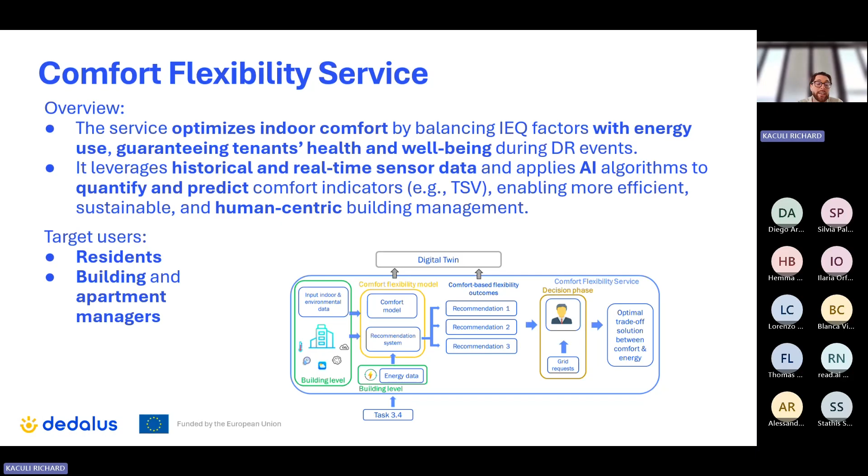I want to note and highlight that this kind of service is a human-centric service, so everything is tailored around the user, and the users are residents or building and apartment managers. How does the service work? We start from the building level, where we have installed all the sensors, the IEQ sensors, and of course energy sensors.

All of this information, after pre-processing, merges into the core of this service, which is the comfort flexibility model, and is divided into two parts: the comfort model, which is responsible for assessing the daily comfort of the tenants, and the recommendation system, which is responsible for providing actionable comfort flexibility recommendations for the next day for the user, and also energy flexibility. I will explain later the difference between comfort flexibility and energy flexibility.

After the recommendation system, we obtain 3 recommendations, and both the daily comfort condition assessment and the recommended solutions for the next day are shown in the digital twin and provided to the end user. As I said before, the end user can be the resident, or maybe a building manager or the apartment manager.

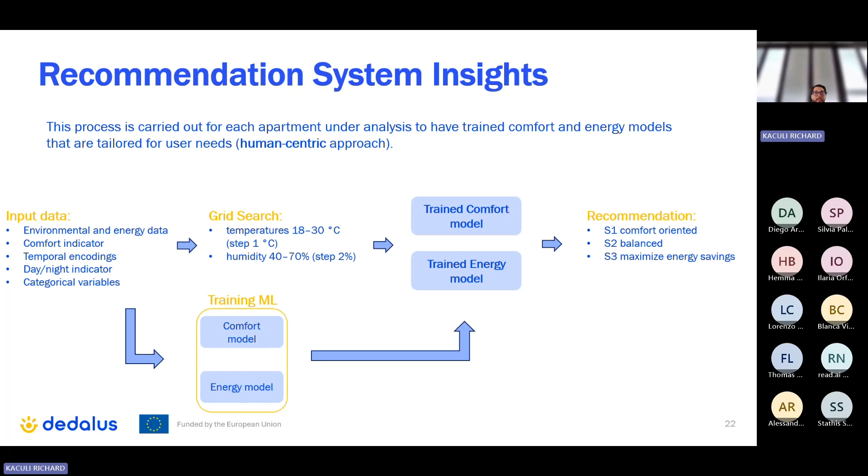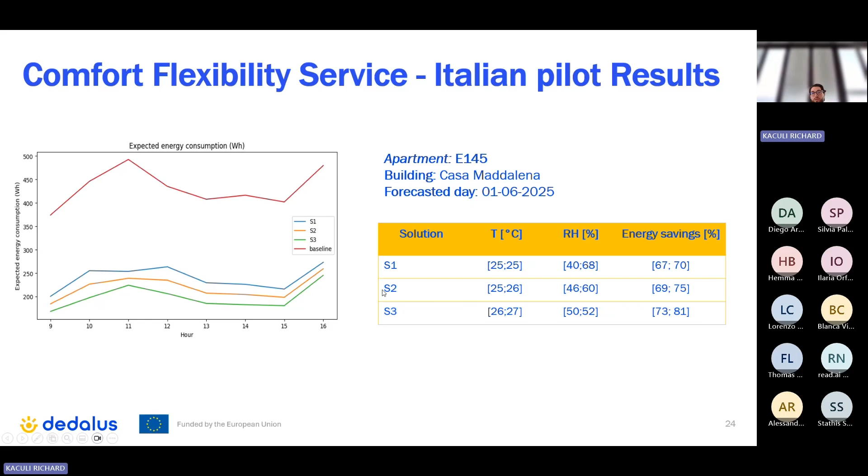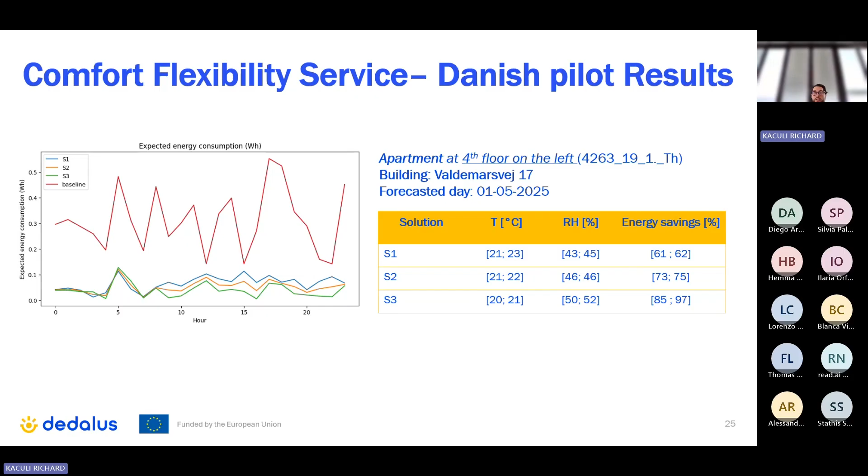Here is another example for the Danish pilot. Basically the idea is the same, but one specific difference from the Italian pilot is that in the Danish pilot we made, as Diego mentioned in the initial part, an energy flexibility based on comfort, of course, but on another energy carrier, which was the heating system. Instead, in the Italian pilot, we were mentioning electricity flexibility.

So how does the demand response work? Basically, we provide the end user the recommendations, so the comfort flexibility actions. When the grid request arrives, the end user or the building manager can choose the best solution that meets the comfort condition of the users and, of course, the grid requests.

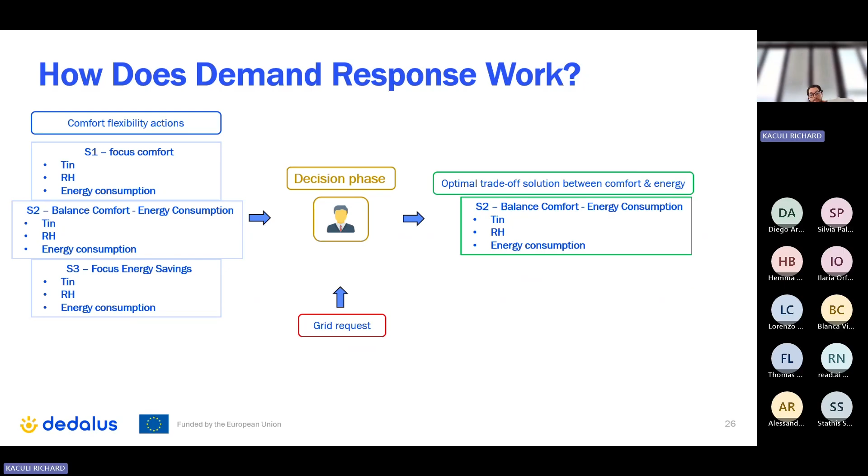To sum up, what we were able to achieve in the DEDALUS project was a comfort enhancement that goes from a minimum of 55 to 82, and an energy consumption optimization between 54 and 86. That depends on which energy carrier we are taking into account.

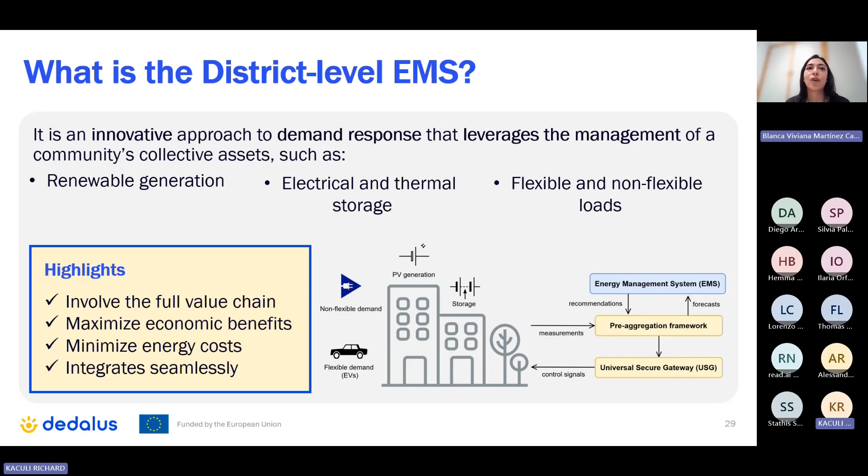So in the figure on the right, we have a typical configuration for our energy community with several assets. Monitoring devices are installed throughout the community to capture the real-time data that is used by a pre-aggregation framework to produce forecasts for both generation and demand. Then those forecasts are used by the EMS to produce the management recommendations for the assets, which are then communicated back to the devices in the form of control actions, ensuring a reliable operation for the community.

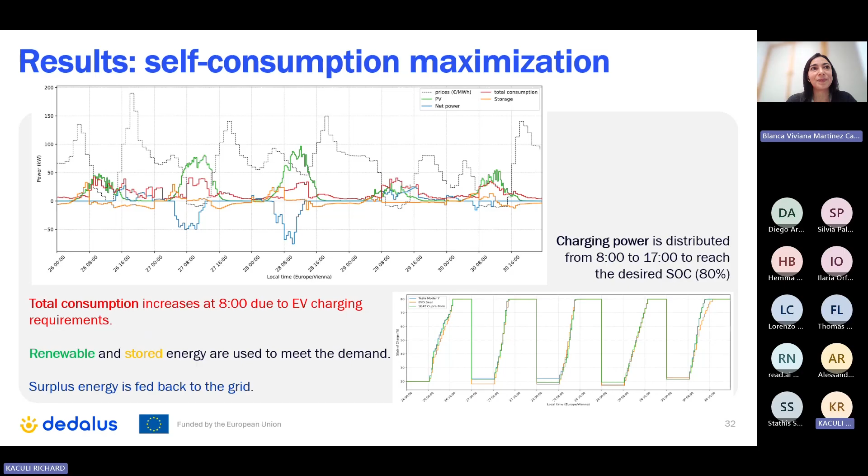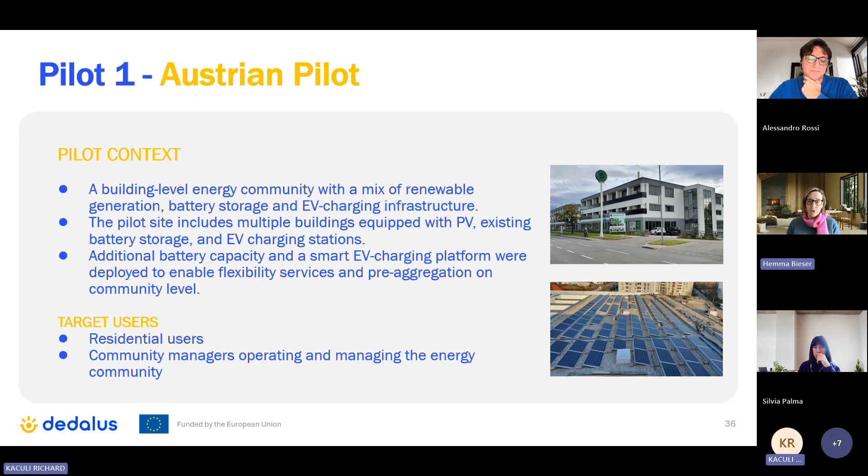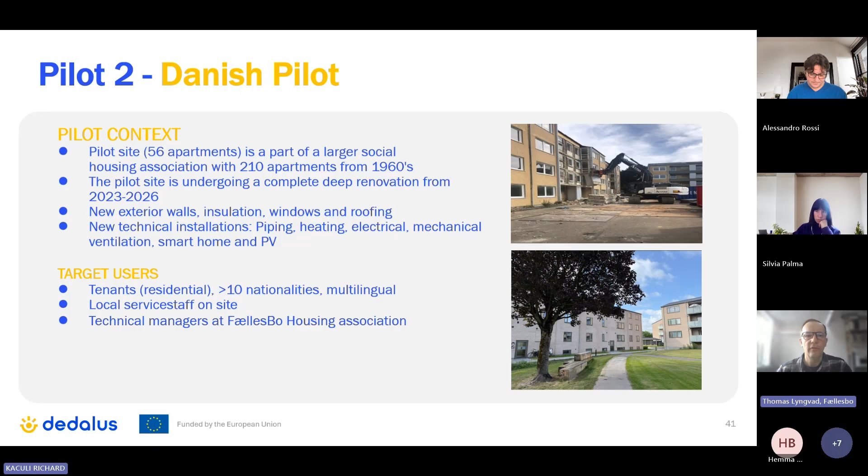The target users are a very diverse group of tenants, more than 10 nationalities, which creates a multilingual environment and unique communication challenges like in the Austrian pilot. Local service staff and the technical managers from the housing association are also involved as they support the residents during the renovation and implementation of new systems. Okay, next slide.

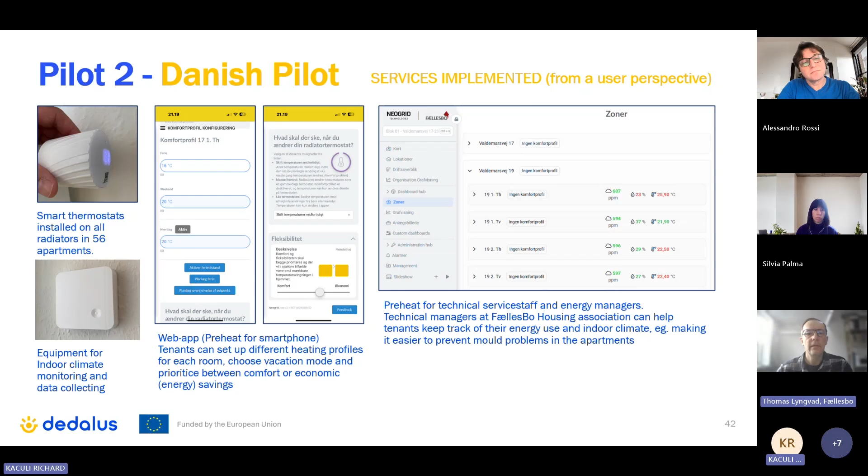The Preheat platform is also available to the technical staff. That's the picture on the far right side. It allows them to support the tenants by monitoring indoor climate and help to prevent issues such as mold. We also installed indoor climate monitoring equipment to collect data for optimization and decision making. Overall, these services aim to give tenants more control, improve energy efficiency, and support better building level heating management. And on the next slide, I will tell about some of the issues and practical challenges in our pilot.

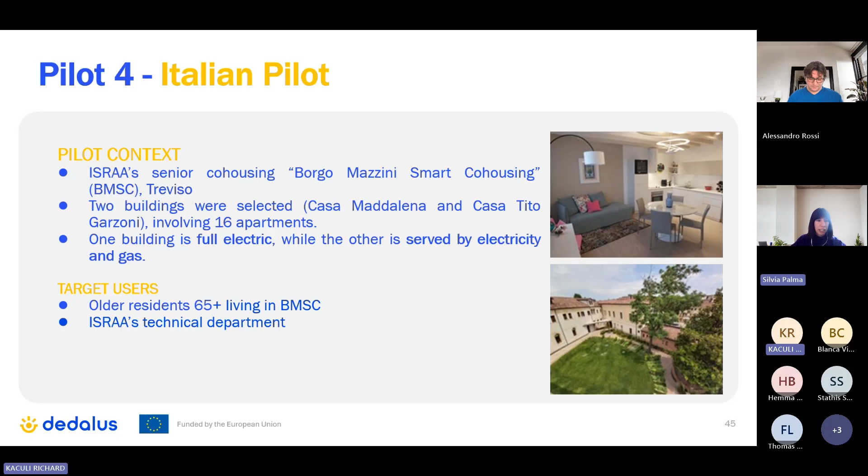In terms of target users, as I was saying, in our co-housing live older residents. They are over 65 years old, but the range of people goes also above 80 years old. All this pilot involved, on the other side, also the technical department, which is part of the administration of ISRAA, because the main feature, and we can see it in the next slide, of the co-housing is that the energy is managed in a centralized way.

But given this, and I will explain this a little bit later, given these buildings, we faced a number of pre-existing issues. First of all, the lack of, or it was not possible to have, renewable energy production. This was due not only to the infrastructure present at the site, but also because the co-housing is located in historical buildings in the city center, and our organization faced a lot of constraints in terms of cultural heritage. We are not able to modify or install, for example, solar panels on the roofs or on these buildings because they are bound by cultural heritage regulation.

And then on the other side, the two buildings, especially this is true for Casa Maddalena, face high electricity consumption. This is one of the main reasons we joined the project, and we tried to work on this. And the organization, ISRAA in general, being a public organization, a public entity, is also bound and is limited in its action in energy provision, management, and purchase, due to a number of regulatory limitations because of its public nature.